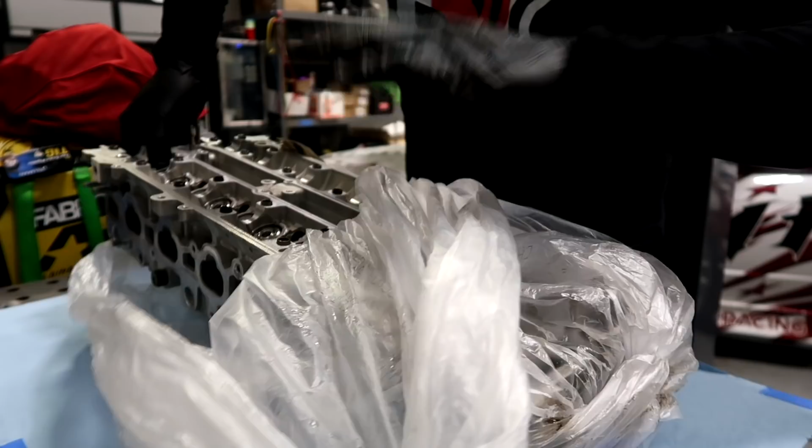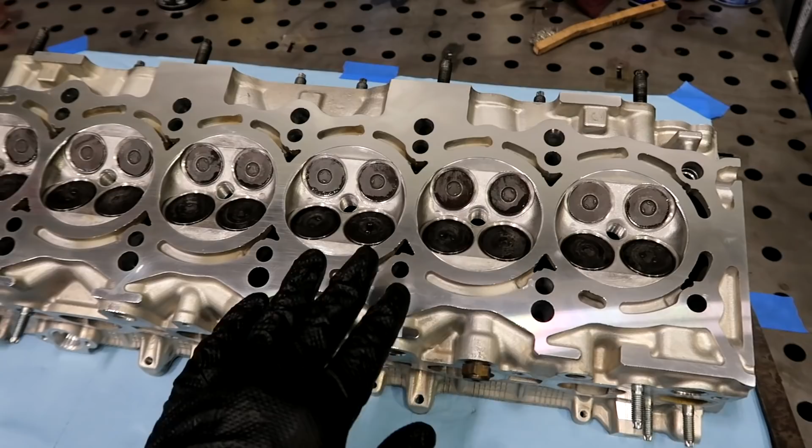One of the most crucial parts when building a motor is to have lots and lots of cleanliness. So you need to be absolutely clean. Every part can't have any debris. So first thing you do when you get your head back from the machine shop, inspect for debris, blow it out with the air. So you have a new air chuck available.

Just push it all out, every hole, wherever. Try to use some brake cleaner, get everything out, and then inspect everything. Then you're good to install it on the block.

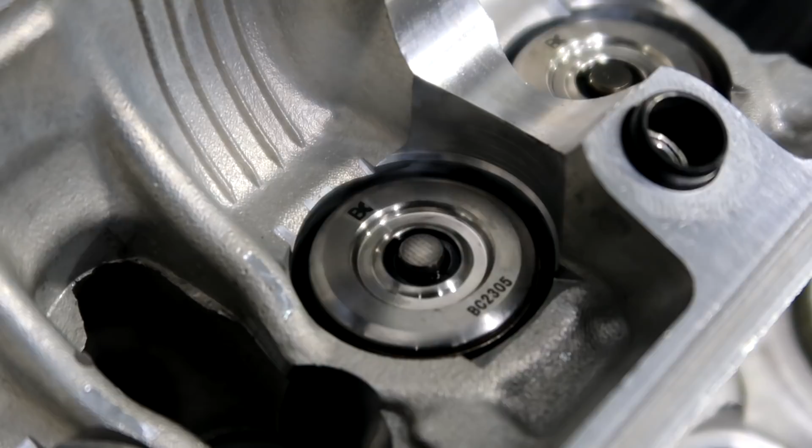So this is what my 2JZ head looks like after being cleaned, decked. It has a valve job on it, and it also got hot tanked to clean out any grease that it had on it. Then on the flip side, you can see the Brian Crower retainers. These are titanium retainers with dual valve springs.

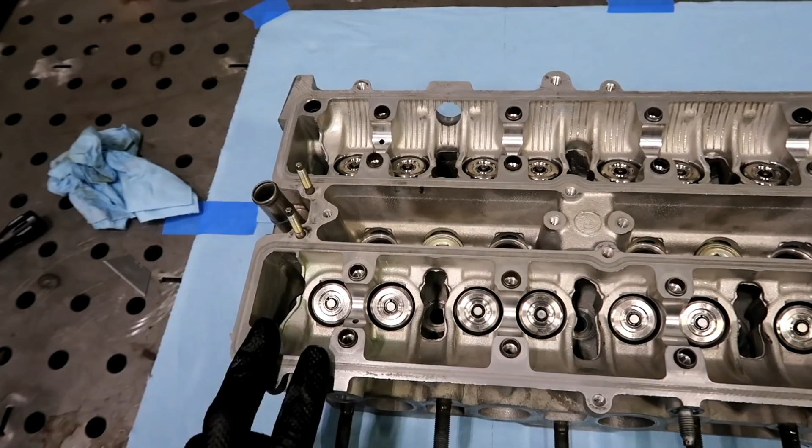Also in there you can see the valve keeper looks a little bit darker than the stock one. These are the Brian Crower billet valve keepers to keep all your valves running together at high RPM. For the cam profile that I'm going to be running, which is 272, I do not need to clearance this area for the lifters because it doesn't have a high enough lift for that.

But there are some cams that you have to trim this part right here to allow the lobe to clear. But in this case, with the BC stage 1 and 2, at least you're not required to do that. I store the bag. I make sure to put at least 2 layers of bags over the block when storing it. That way there's no debris getting into the inside of the motor.

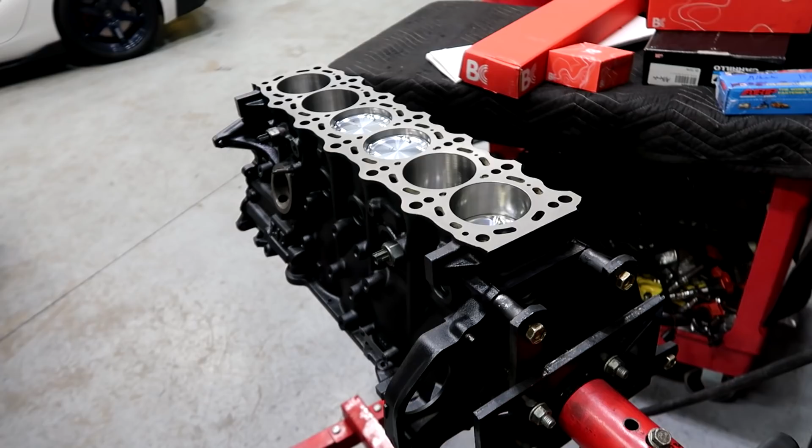So now we're gonna unwrap this. And this is what it looks like underneath the covers. The block has also been very finely decked to run an MLS head gasket. So on these blocks, pretty much you have to run the super smooth decking because the factory head gasket is also metal. We're basically ready to install the head, except we don't have dowel pins.

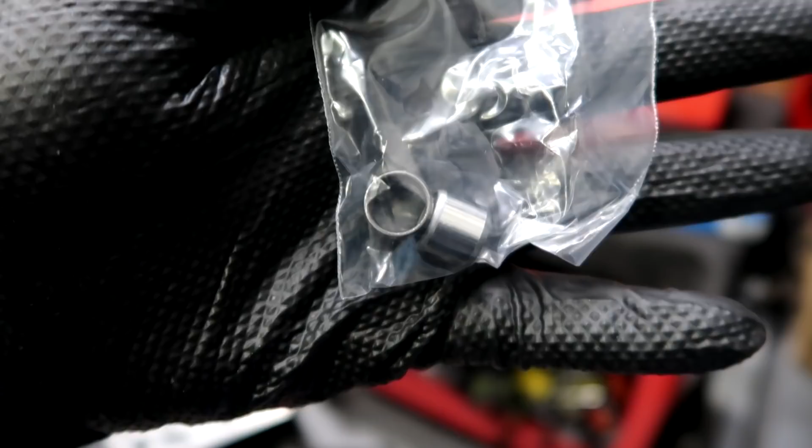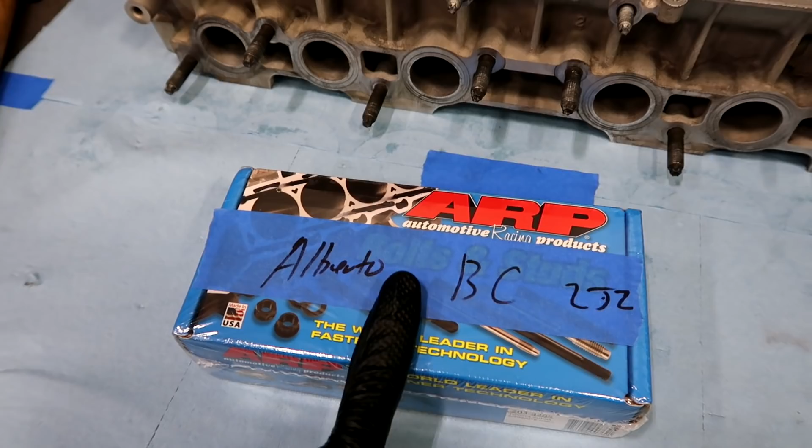Good thing about a new set from Toyota Motorsports, sweet. These are very easy to install. You just pretty much put them like this and tap them into place and done. A very must-have when running any sort of high-performance engine is to put ARP studs. I'm going to be using ARP 2000s on mine. These are more than enough for the horsepower that I want.

Then for head gasket, I'm going to be running the Brian Crower BC8230 Toyota head gasket. A very nice multi-layer head gasket. I like that it even has the BC logo on the corner. This one is a 5-layer steel head gasket. Now double check, triple check, make sure everything is clean, and we're ready to drop the head gasket.

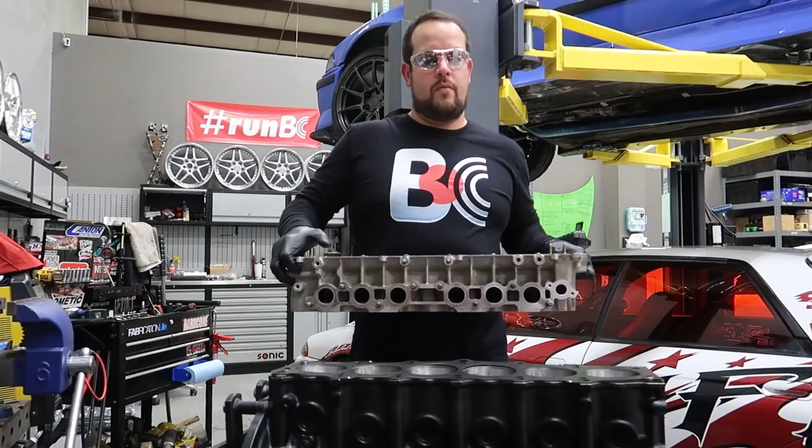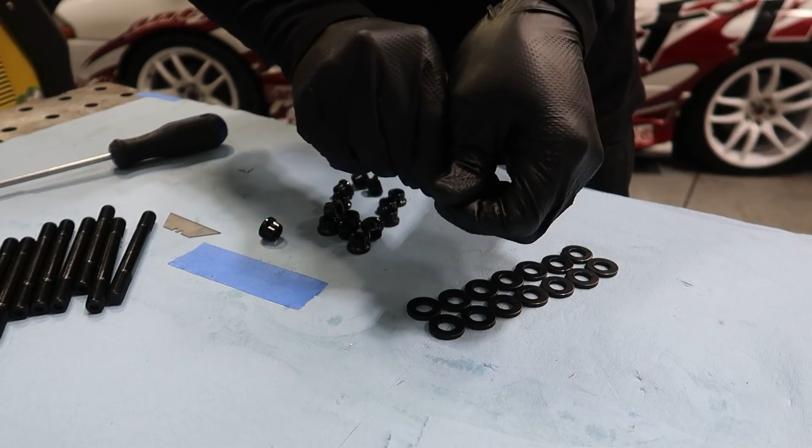Now very carefully, we install the head onto the block using the dowel pins as guide pins, which is what they're for. And gently position the head in place. Now it's time to install the head studs. The first thing, you want to open up the packet of grease, and we're gonna install the washers onto the head first. So what you want to do, you want to put lubricant on both sides of the washer.

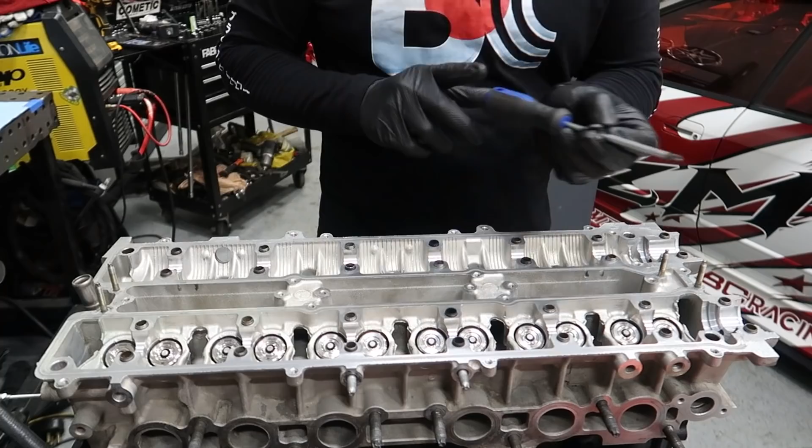Then I'm gonna use a screwdriver to guide the washer through, and we're gonna drop it into each bolt hole. So pretty much using this, I got the washer here. Then I'm gonna use this to guide the washer through. And then we have our washer down there in place, and it doesn't fall onto the side or anything.

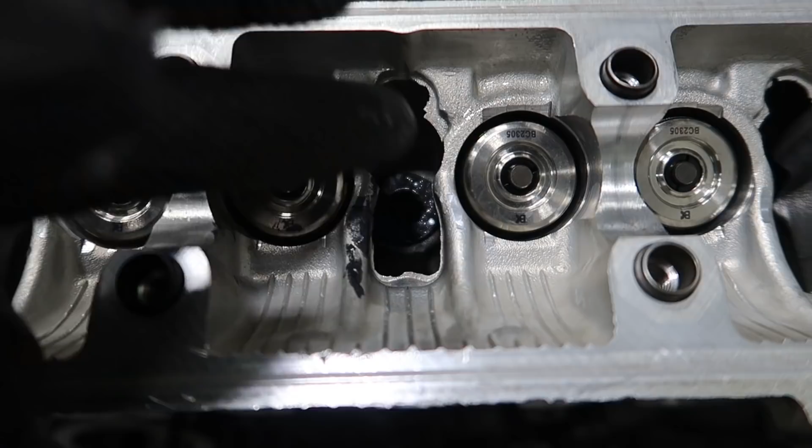Then for the studs, you grab a little bit of assembly lubricant, apply it on the tip of the stud. Then you thread in the nut a few threads. Then what it's gonna do is drag the grease through all the threads, and it's also gonna have residual grease on the bottom of the nut. That way it's able to lubricate between the nut and the washer.

Now we can drop in the studs. This is pretty much the best process to do this, the easiest step. Make sure you don't get stuck, because if you don't put the washer on first and try to put it on with the stud and nut, obviously it's not gonna go on. If you put the washer on before you put it on the block, then you have the problem of maybe the washer just flying around or sliding around the head and then gets lost.

Alright, we got this one more. We're in. So the size for these studs is 3/16. Then you're gonna drive them all the way in. This greatly speeds up the process than doing it by hand. We can tighten the nuts on the studs, so those are gonna be 14mm 12 points.

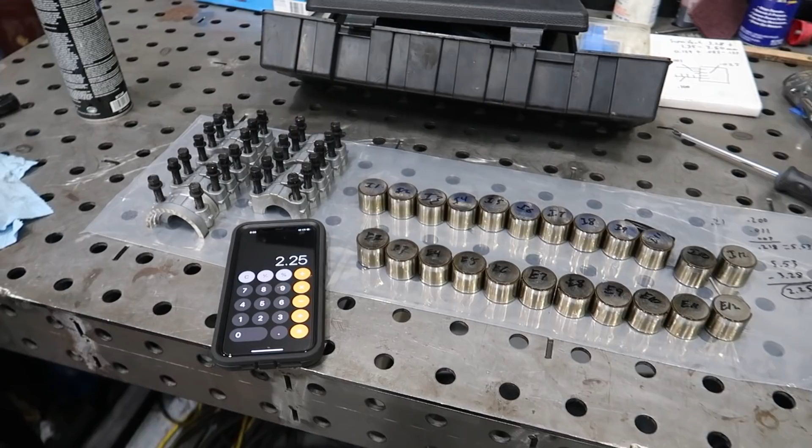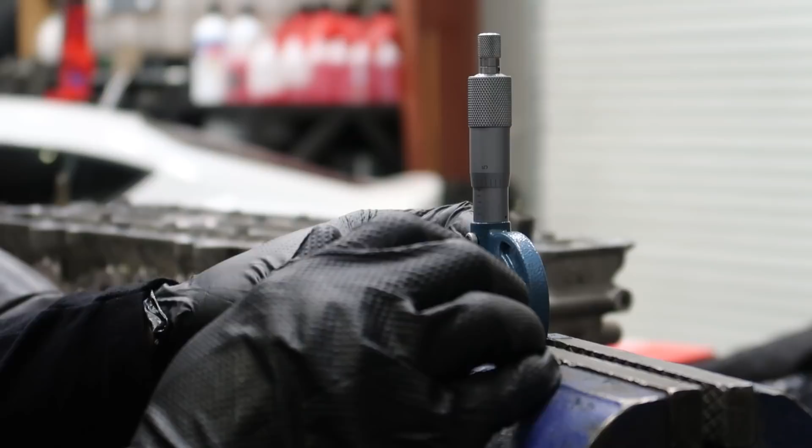I got all the lifter buckets right here, and I'm doing the math, trying to calculate what's the thickness of the stock buckets. I'm now taking the cam followers and measuring them with a micrometer so I can see what the thickness of the stock buckets is, and then I will install the cams on the engine and then measure the valve lash clearance and go from there.

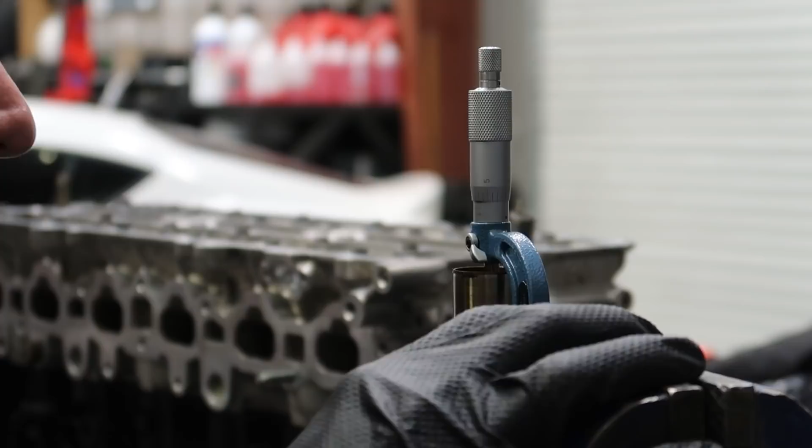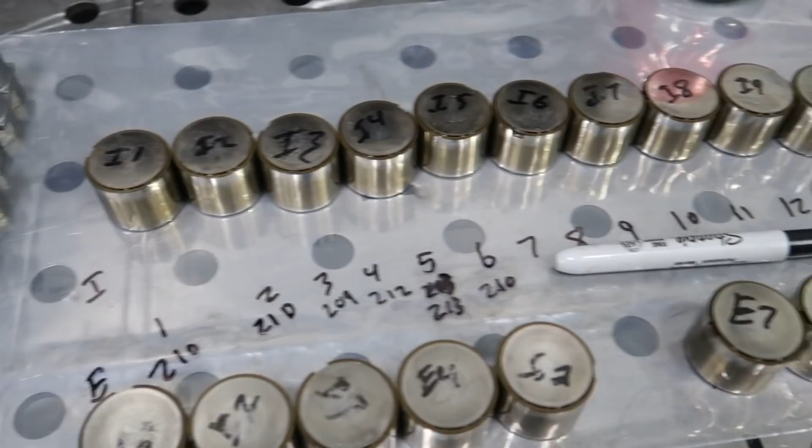This follower has a thickness of 0.210 of an inch. So I'm writing that down. So far this is what I have: exhaust 210, 210, 209, 212, 213, 210. So once I finish those, I'll do the same thing on the intake, then install them on the motor, put the cam, and then with the feeler gauge I'll measure the lash.

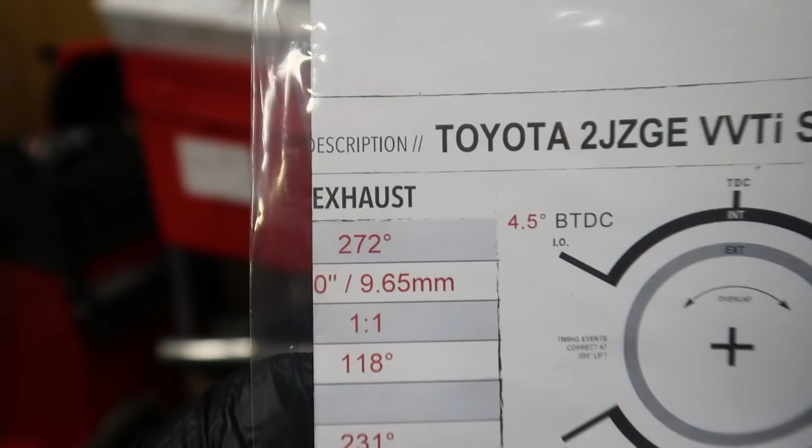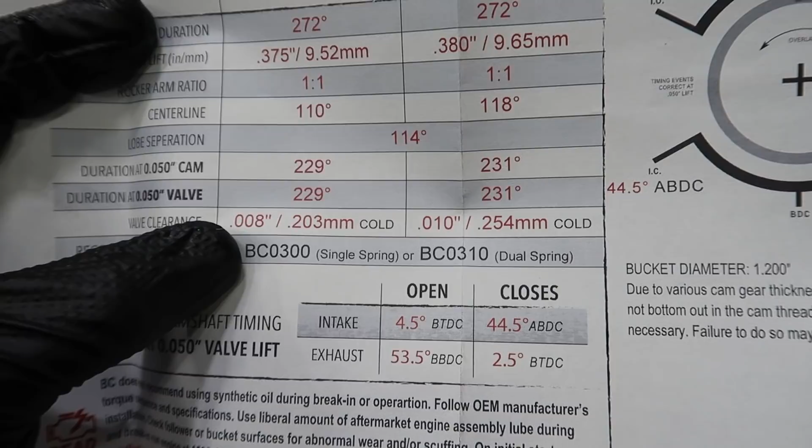So the lifters are in, so now we gotta open up the BC cams. A couple of you guys already know, but I'm running the 2JZ VVTi Stage 3 cams. These are 272 durations. These are the nice ones. Then here are the valve clearance numbers we're looking for. So we're looking for 0.008 or 0.010 on the exhaust. So let's see if we can get close to this. If not, we need new buckets.

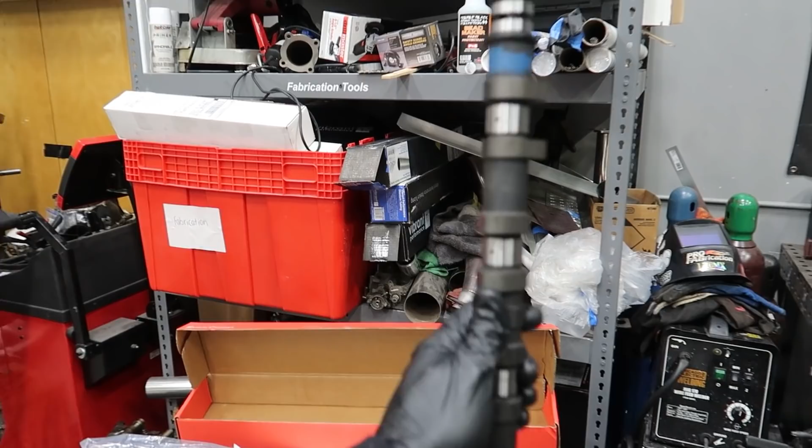We have the camshaft out of the box, and now we just have another box to open. You can see the cam. Here we go. So this one is the intake side. So here we have the 272 intake camshaft. Let's go ahead and drop this thing in. There we go. Now to the exhaust camshaft. And now we drop in the exhaust camshaft.

I just need some cam caps and then we can measure our clearance. I did not put any lubricant right now since all I want to do is just measure the valve clearance. The lubricant will kind of make that harder, kind of get in the way. So I'm going to do those dry.

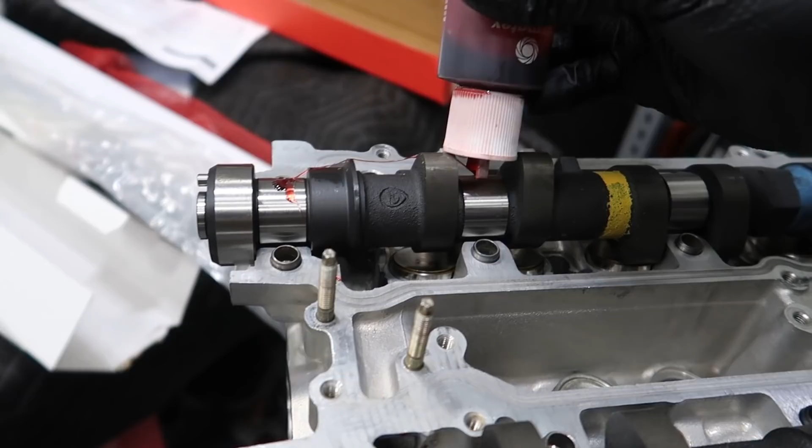I'm going to put a little bit of Permatex Ultra Slick engine assembly lube on the journals so it spins smoothly. Let's pretty much put a drop on each one. That should at least help spin the cam easier. Make sure I don't scratch anything. A little bit here, a little bit there. You get a drop, you get a drop, you get a drop.

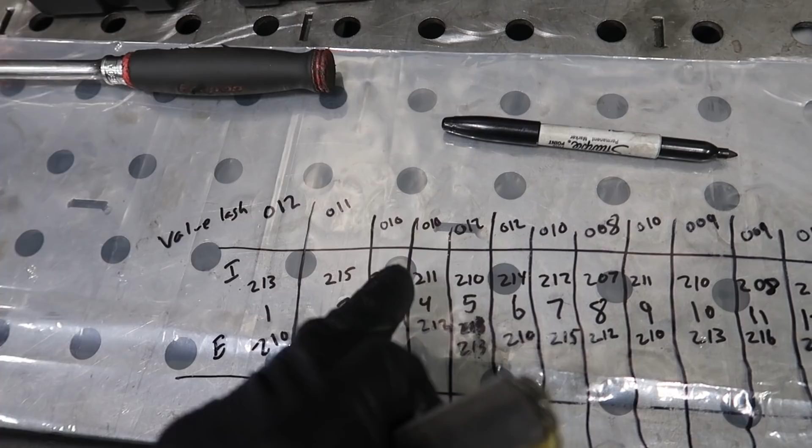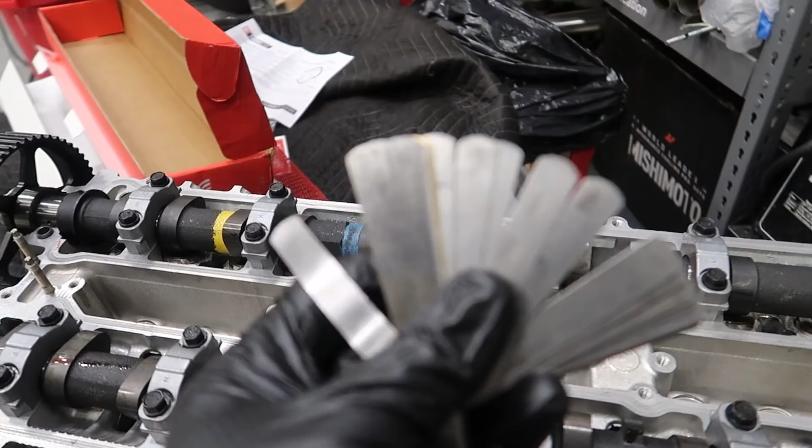I did my intake valve adjustment and these are the specs that I got. So I got 0.012 on the first one, 0.011, 0.010, 0.011. The only one that's within spec has to be valve number 8. That one's 0.008, and so that's what we're looking for. So to check valve lash, I kind of make it easy and start with the 0.010 and then go either smaller or higher from there, since 0.010 seems to be the average.

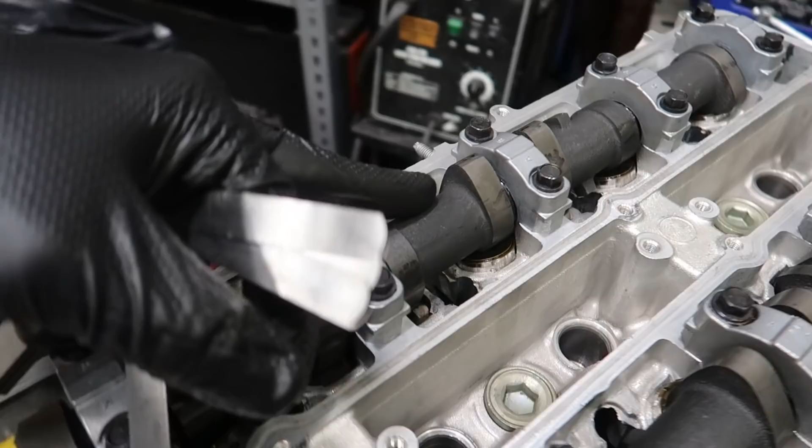So on these valves, for example, the lobe is facing up, so then you have clearance on the other side. That's how you measure them. So each valve you're gonna measure, you have to rotate the cam so the lobe is pointing away from the valve, and then you can measure the free floating clearance on the other side. So if I grab the 0.10 feeler gauge, I can put it between the lobe and the lifter, no problem. But if I try on the other side, it won't go in. So that means this one is either 10 or bigger, and this one is smaller than 10.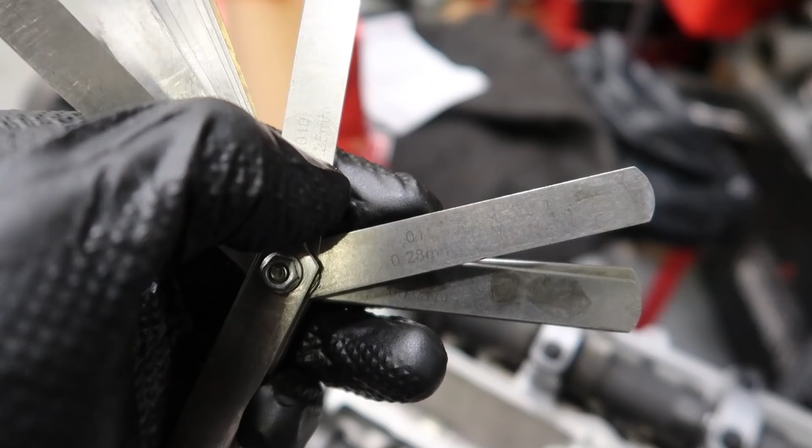So now I grab the 0.11 and I'm gonna try on this side again, and it doesn't go in, so that means it's 0.10. Now on the other side I'm gonna go 0.09 and let's try it. It doesn't go in. Now we try 0.08 and it goes right in. So this valve is 0.08.

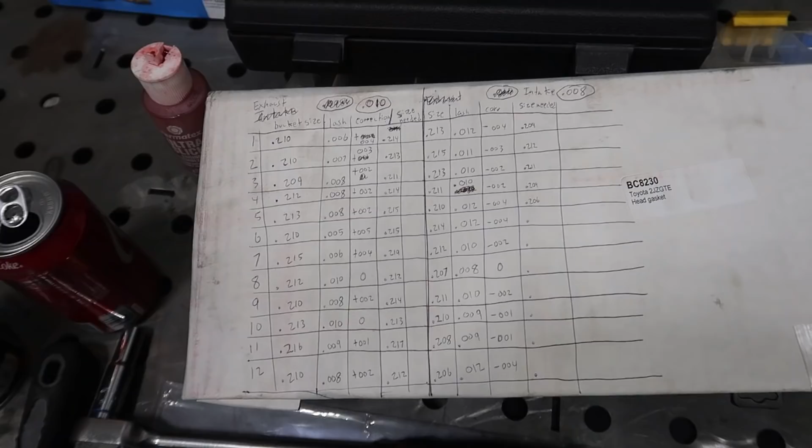Little bad side about working late nights. I made a little mistake with my numbers. So here I was adding everything up and I was like, this is making no sense. And then I go back to the chart. I had the buckets laid out with the exhaust on this side, intake on that side, and the head is the other way around.

So I have intake side readings on the exhaust side and exhaust side readings on the intake side. And that's why my numbers were not adding up over here. So I'm gonna have to redo this list again.

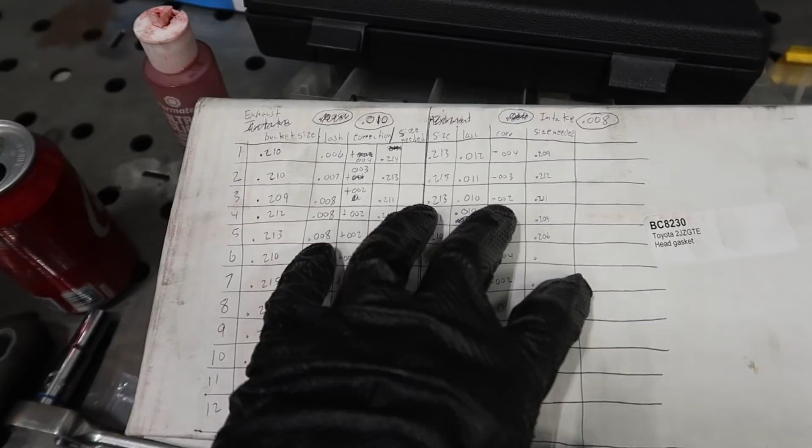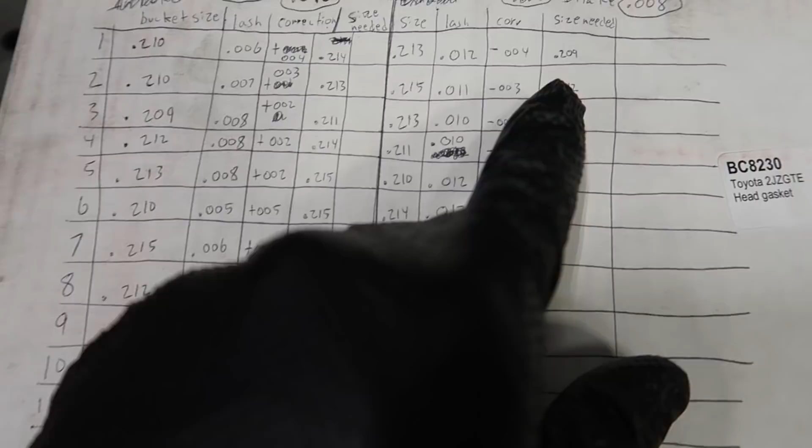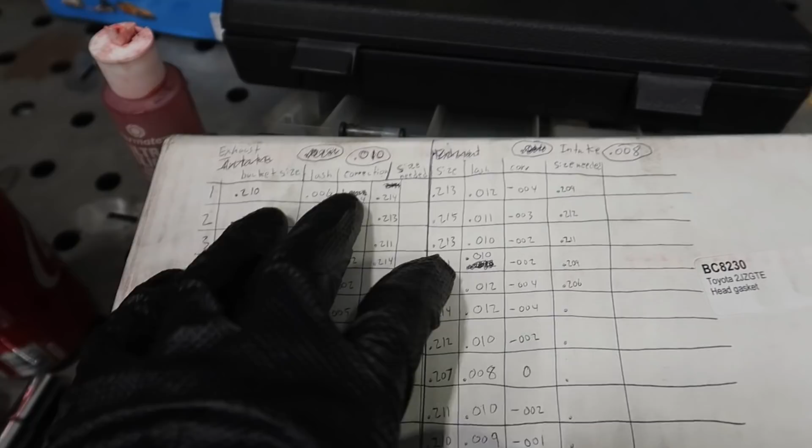So what I did, I have bucket size, the lash, the correction needed, and then the final size bucket that I need. And that's where I figured out that my size needed on the intake was a lot smaller than the size needed on the exhaust. Like, wait a minute, this makes no sense. So I'm gonna fix this up when I get home now, and then we'll do the list again.

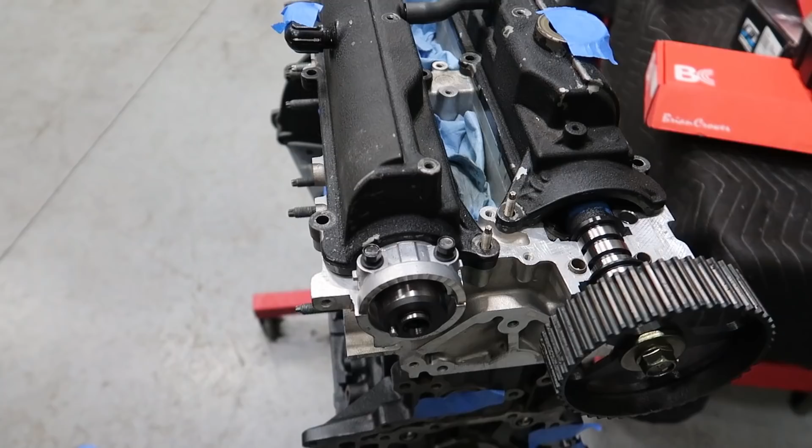After spending a couple hours trying to simplify this system as much as possible, it's gonna allow you to determine the valve lash on the 2JZ engine the simplest way possible. I was gonna hold off showing you guys this until later, but yes, I got some GTE valve covers. I'm gonna have to send them out to get powder coated to make them nice. They're pretty rough right now, but they're gonna look super sweet.

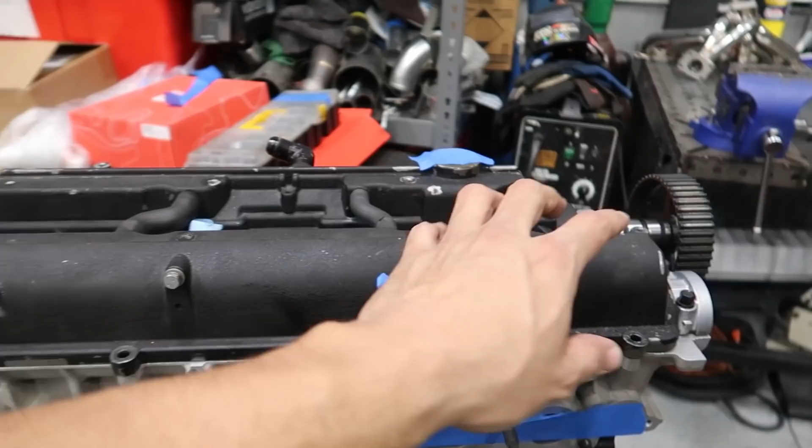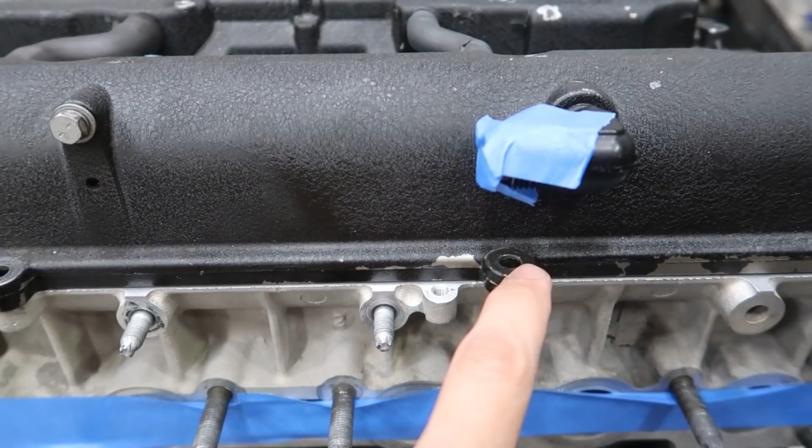Before I cut to the chase, one very important highlight here is that the GTE valve covers, for some reason on the VVTi engines, this doesn't line up. I noticed that the GE head has this here and has another one right here, so you can put either GTE or GE. Every other mounting spot lines up minus this one, so I'm gonna have to cut this and weld it on this side over here so it lines up, and kind of redo the hole so I can bolt down the valve cover properly. So let's go ahead and take these guys off somehow with one hand. Almost impossible.

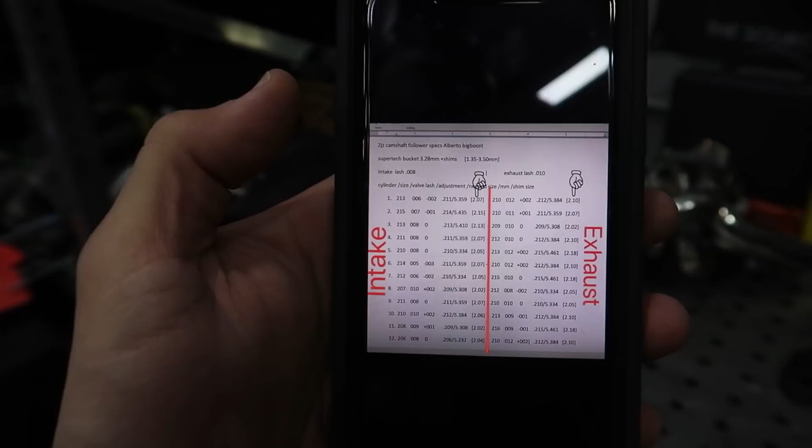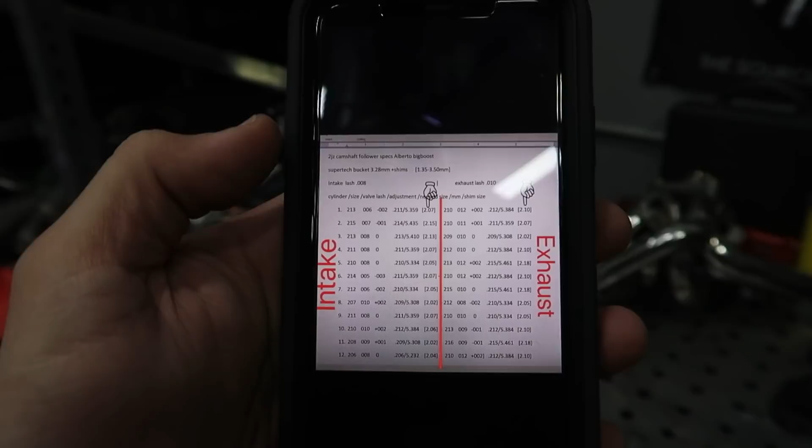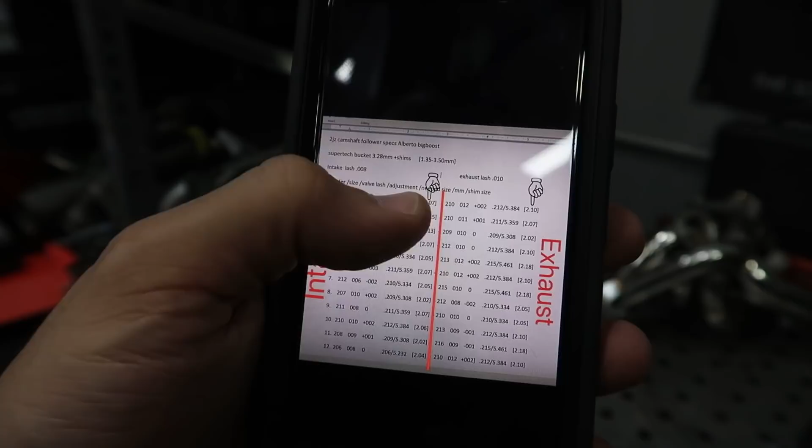Previously in the video, I showed you how to rotate the cam and get it ready so you can check the valve lash properly. Now I need to explain what the process is after you get those measurements. I'm gonna put this on the screen, but I determined that by making a formula first. I have the 2JZ camshaft follower specs for Alberto BIGBOOST. Then we're gonna be using SuperTech buckets that you can install a shim in between 1.35 millimeters to 3.5 millimeters. The bucket itself has a thickness of 3.28 millimeters. Then you add a shim between 1.35 to 3.50 to get the right lash.

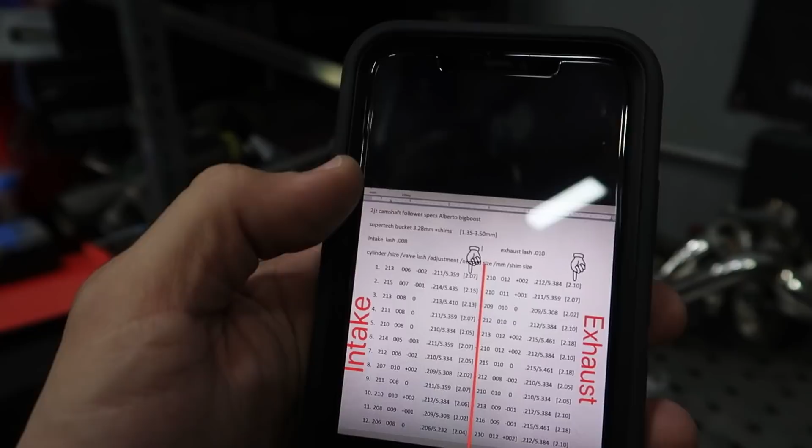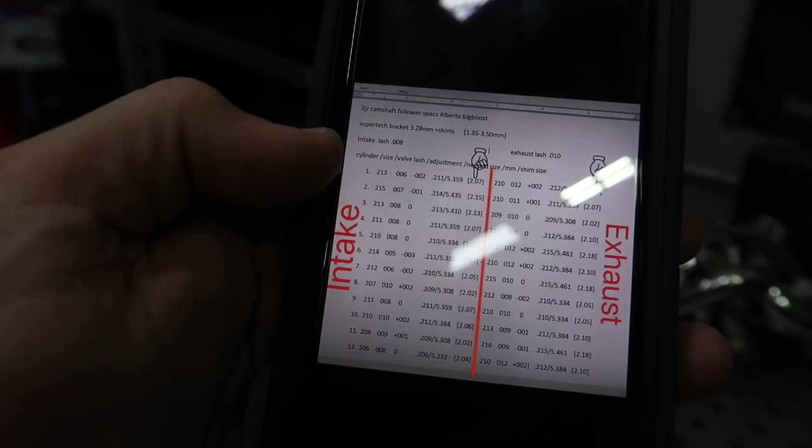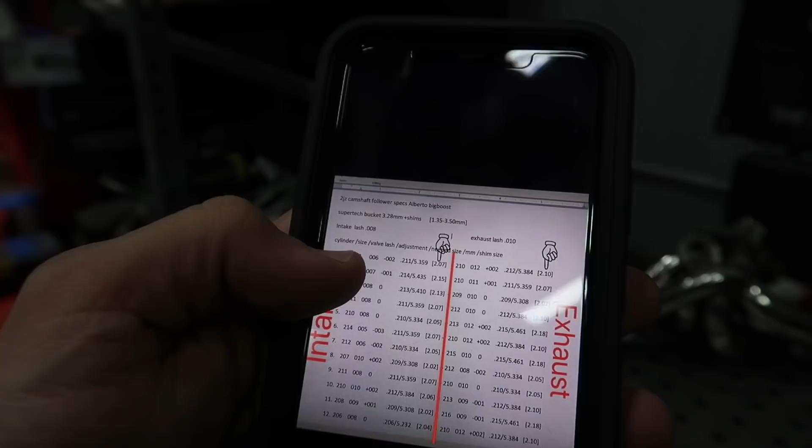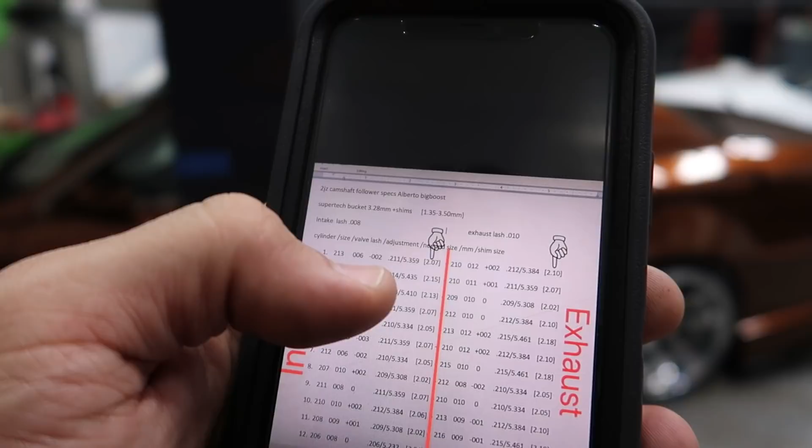Now, based on the information from BC, the intake lash should be 0.008 and the exhaust lash should be 0.010. I showed you guys also how to read that on the lash tool. Then I made over here a table 1 through 12. You have 12 valves on each side, intake and exhaust. Then I measured with the micrometer that my bucket on number 1 is 0.213 of an inch, right? And then I have a valve lash of 0.006, and it needs to be 0.008, so 0.006 is too small. So I need to make a correction of adding 0.002 of gap. That means I gotta make the bucket 0.002 thinner than the current bucket that's on there, and that's where I get my measurement of 0.211.

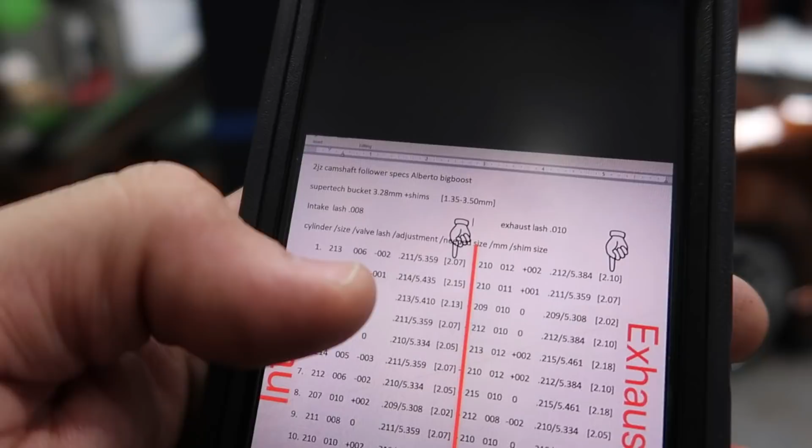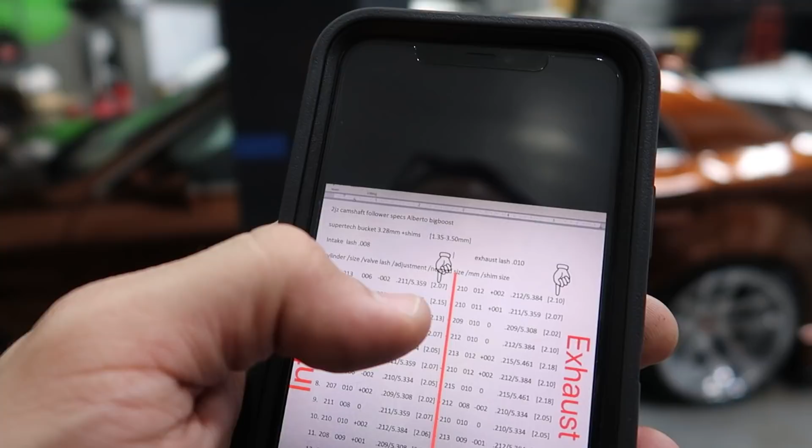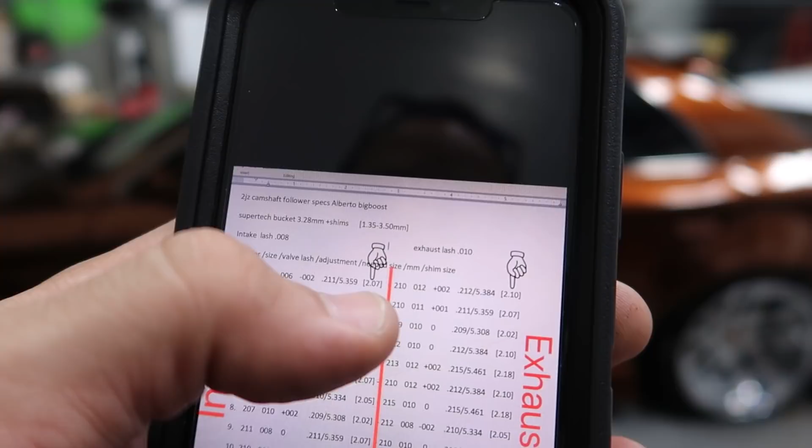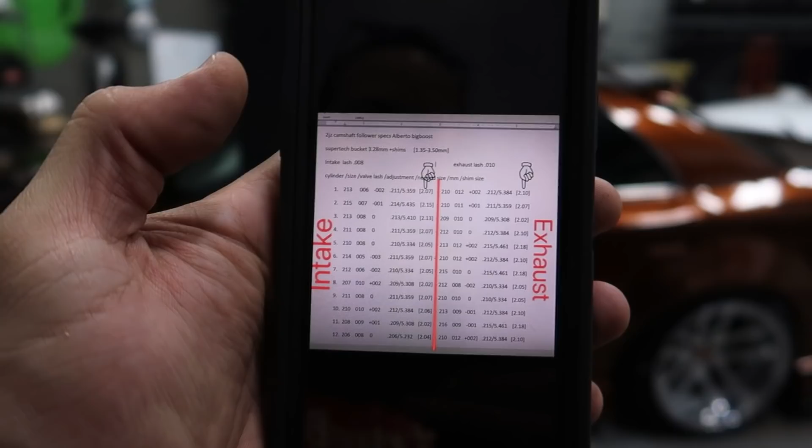Then I also have to convert that to metric, since the SuperTech buckets have the measurements in metric. 0.211 equals 5.35 millimeters. So now I have 5.35 millimeters, and then I deduct the SuperTech bucket thickness of 3.28, so that means I'm gonna need a shim of 2.07 millimeters. And that's the formula for what shims I'm going to be using on the head, and I repeat that with all the cylinders. Now we can move on to the rest of the engine.

So you can see something very odd: this sprocket does not belong here. This is an exhaust sprocket on the intake side. I just put that on there so it'll be easier to rotate the cam with a 17mm wrench than trying to spin it through this. And I also didn't want to put the VVTi one with an Allen bolt because it was a little harder to rotate that way.

I think that's a lot of solid content for this video, so I'm gonna go ahead and close this video out now, and then I'm gonna record another video installing the rest of the accessories on the motor, starting with the oil pump, because I finally got a nice OEM oil pump. I'm gonna speak a little bit about oil pump differences, so you can know a little more about what suits your engine best.